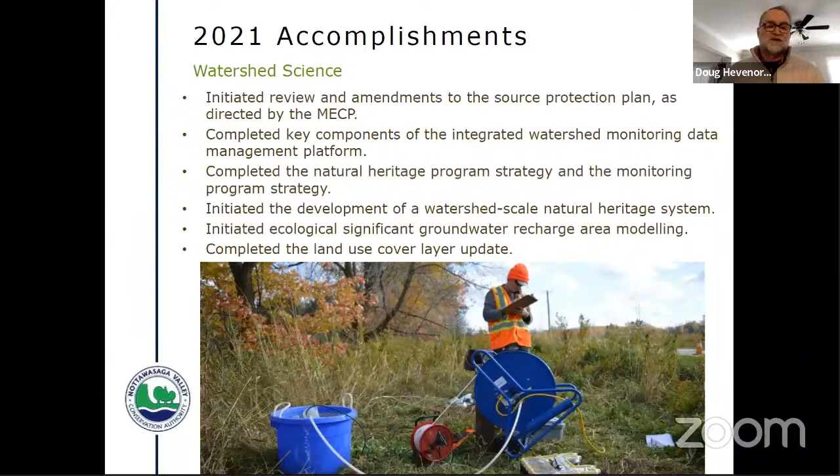The education program, as a result of COVID, has been very hard hit over the last 2 years. In 2020, we had no delivery of programming whatsoever at the NVCA. Again in 2021, we were hit very hard at the first part of the season. We did run a very successful camp for young campers at Tiffin this fall, with 400 people participating. It's one of those programs that relies heavily on levy, and as we go through discussions in the transition period from December 31st this year until December 31st, 2023, we'll touch on some of those points. Programs that don't receive levy don't have other sources of finance, which can be quite challenging. Education recovers a lot of its programming but still requires some nominal seed money to get it going, and it's an important program. We deliver programming to over 14,000 students in Simcoe County, tied right into the curriculum at the grade 4 level. Next slide, please.

Stewardship and restoration are also the lifeblood of the watershed. Stewardship does the majority of its work along the streams. We are a riverine system running from the Oak Ridges Moraine up north to the Georgian Bay Basin. The only part of our catchment that doesn't run into the Nottawasaga is over in the Collingwood area with Black Ash Creek, Pretty River, and the Batteaux, which run into Georgian Bay directly. We've done the lion's share of our work the last 2 years down in the southern end of the catchment in Adjala, where we were very successful in remediating a cattle operation that was crossing the river system. This is the headwaters for the Nottawasaga River, and a remarkable legacy resource for the Chinook salmon that are part of the really active fishery just to our north in Georgian Bay.

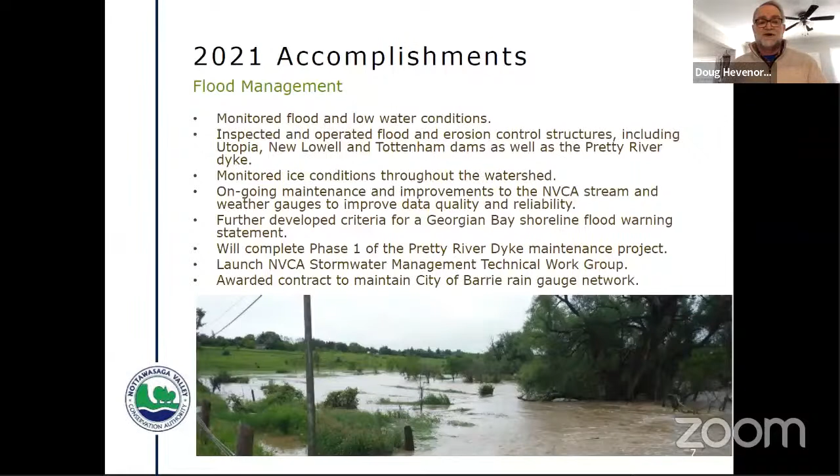This year we're working in conjunction with Collingwood through their funding of $100,000 to do tree removal maintenance and understory maintenance in the area. Unfortunately, the catchment has a large number of native ash trees that have succumbed to the emerald ash borer, so it's a two-pronged approach: we're getting rid of an invasive pest out of that area while still making the area safe for water to pass through.

In planning and development, we work through a lot of acts. One thing it's important for council to remember, when you get calls about our permits taking too long or why we need the NVCA's opinion, is the great number of acts we work through: the Conservation Authorities Act, the Planning Act, the NEC - Niagara Escarpment Planning and Development Act, the Aggregate Resources Act, the Green Energy Act, the Drainage Act, and the Environmental Assessment Act.

In many of those roles, we play a regulatory role where we are the entity that says no, and not everyone likes to hear no. It's not always beneficial to moving a project forward when you hear those short two letters, but it's something we don't take lightly.

We do constant measurement throughout the year of our calc, a data point for managing files. It's worked through with the MECP to deliver a file within 90 days. Conservation Ontario has challenged that calc document to move to a 70-day delivery. On the 90-day delivery, we're currently delivering at 98%, and at the 70-day, we're currently delivering at 91%. It's important that people realize we're trying to do the best we can and allow permits to flow quite regularly. Next slide, please.

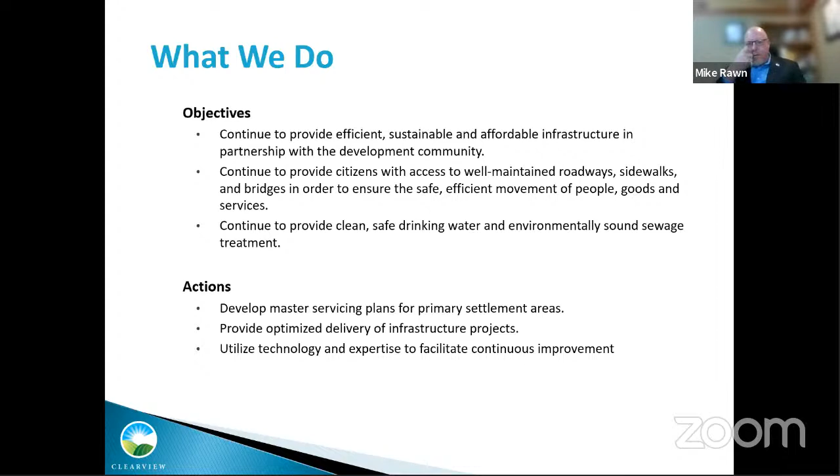That last bullet under actions is pretty key: to utilize the expertise and technology to facilitate continuous improvement for this department. For the whole town to be successful, we rely on the expertise of every employee and the input and expertise that they bring to the table. Next slide.

I think we're one too far. Yeah, we're just going to talk about this for a second. So council's aware Clearview's infrastructure needs are projected many years in advance. And most of the large projects are developer driven, and we work with the development community to ensure the infrastructure is available when needed. Next slide.

So these are some of the critical projects we're working on right now in Stayner. You can see by that list, these are projects that have been in council meetings for a long time, some of them years. Out of that $60 million worth of work that we're building in the next couple of years, 85%, or 51 million, is being upfronted by the developers. You can imagine the amount of work it takes to design, review, build, right to the last brick in some instances.

The $51 million that is being upfronted doesn't necessarily mean that it's entirely covered by the developer. So on these individual projects, Sunnidale Street, that's the Manortown project. On the next slide, I'm going to show you a map, but for some of these projects, it's partially funded—we're going to have some funding from the roads budget, some from water.

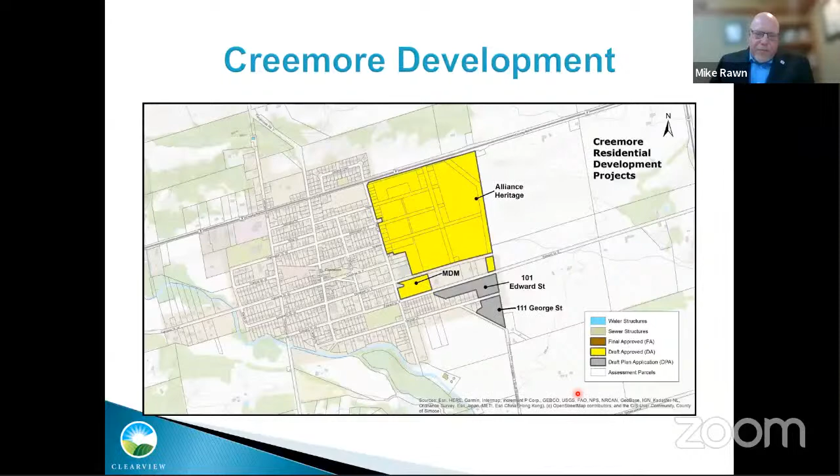The master servicing plan I talked about will address the infrastructure needs for everything. Let's go to the next slide now, Fawn. So if we just read through this list.

So I talked about $200,000 per EA—that's about the cost of it. So a master plan, we could do a master plan for Creemore, and on all those items we can address the first two phases of the municipal class EA, right? All the public input—it will allow public engagement, which I know council likes.

It will take a system-wide approach so that, you know, there may be one developer in town that has the means to advance faster than the rest of town, but as the municipality, we want to develop the town as a whole and ensure everything we build is well operated, long lasting, and cost effective to operate.

The last bullet here is pretty important. It does provide a guidance document. Now, a guidance document is going to be very critical in succession planning in this municipality. There are changes in the next few years, as there always are, but the amount of work that has to happen in Creemore, and now we've got a good developer—well, not that there were no good developers before, but a developer that seems really interested in moving forward. We want to work with them and make sure this is all done right.

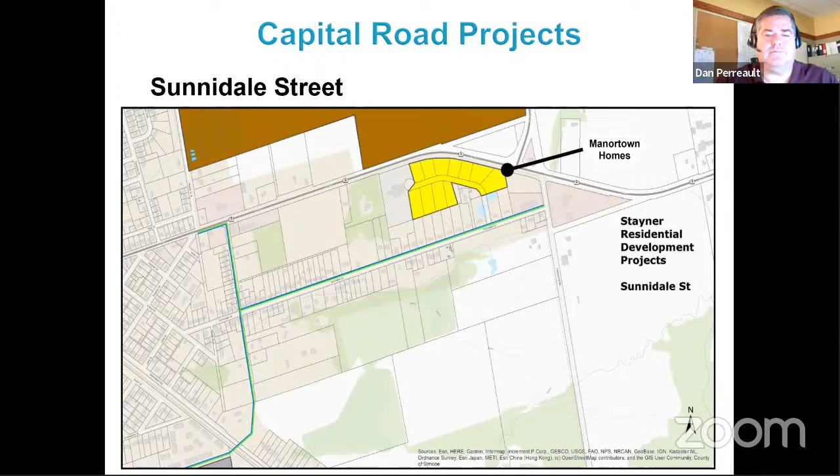Also for 2022, we anticipate the portion of work needed for Margaret Street, spearheaded by the developer as part of their approvals for Ashland Meadows Phase 1A and Phase 1B. Phase 1B in particular requires them to urbanize Margaret Street from County Road 42 to the east end of their development. There are other proposed works, indicated with blue and green lines, that Todd will speak to in his part of the presentation. The urbanization works would also include curb and gutter, storm sewer, and sidewalk.

We're also proposing to continue the concession 10 reconstruction. Phase 1 is nearing completion; it was supposed to be complete this week, to be honest, but I don't know if they'll get there—they've run into some weather, especially up on the hill. At some point this year they'll be finished, and the road will be open for the remainder of the season, then closed again next year for the remaining construction from 30-31 to where they've left off this year.

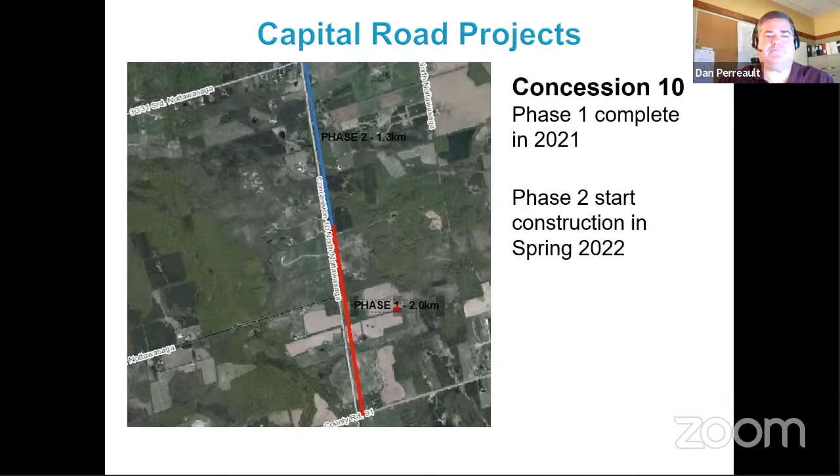Mr. Ron also spoke of Locke Avenue. We've worked quite diligently this past year on the design to urbanize it. There will be some sanitary sewer required, which Todd will speak to. As part of the urbanization, we're looking to add a sidewalk on the south side of Locke Avenue from Highway 26 down to Jonathan Court, with the school crossing moving from where it is now down to the intersection, with a proper landing spot on the north side of Locke. This would require eliminating a few parking spots on that north side, but it will give students a good landing spot and a crossing guard further away from the highway—plus curb and gutter, new asphalt, and sidewalk, with Todd speaking to the servicing.

Another thing that I've been working on for the last year and a half or so is our street scan. All of our roads have been scanned by a van digitally. It takes video or pictures of all our roads, the deficiencies of those roads, and has compiled them into pavement condition indexing.

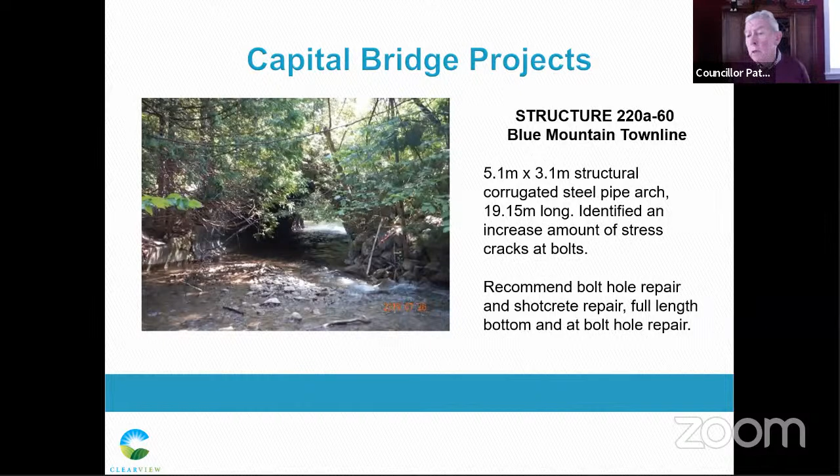The street scan, I love this software because it's database driven. In context to the framework, it's where you're going, Dan, and in all your major construction works, we're not flying by the seat of our pants anymore. Not that the visual wasn't good and experience rated, but now we have much better consistency across our decision making if we use the data.

Sorry, if I can just add, so that we have this done, my thinking is that we need to as a whole start thinking about what it's going to cost, for water and sewer. The rates are built in, so they know they put in a water main today, and it's going to need to be replaced in 100 years, and they factor that amount into the sewer rates. That really hasn't been done.

It's not any fault of anybody's, but it's really not done in the roads industry. I guess it should be done as part of our asset management, but we're certainly going to be working on that in order to develop some sort of, I'm not going to call it a rate system, but an amount that could be considered by council for capital road resurfacing and replacement over the years, so that we're not coming to council every year asking for 5 million dollars to do some of this work. So that's the thinking of this program as well, and that will be able to tell us.

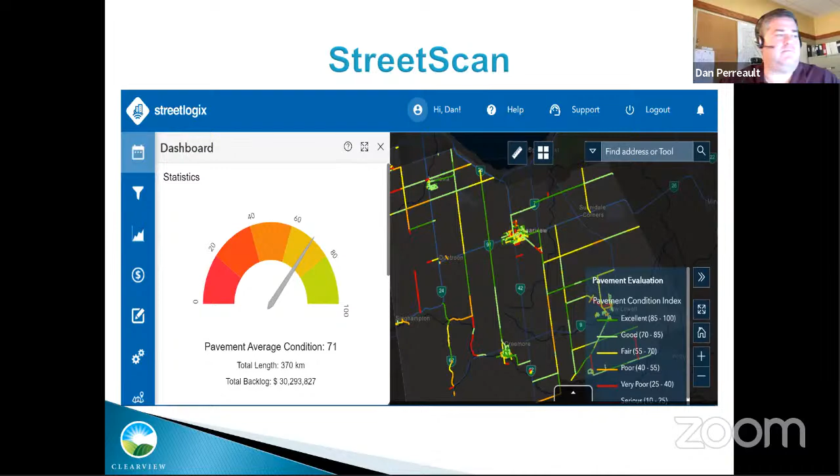Yep. If Fawn, if you can put back that slide. I think it's the next one. Is that? That's right, sorry. That's right, yeah, it's the next. There. Oh, no, it was right behind the other one. Keep going, but 3 slides.

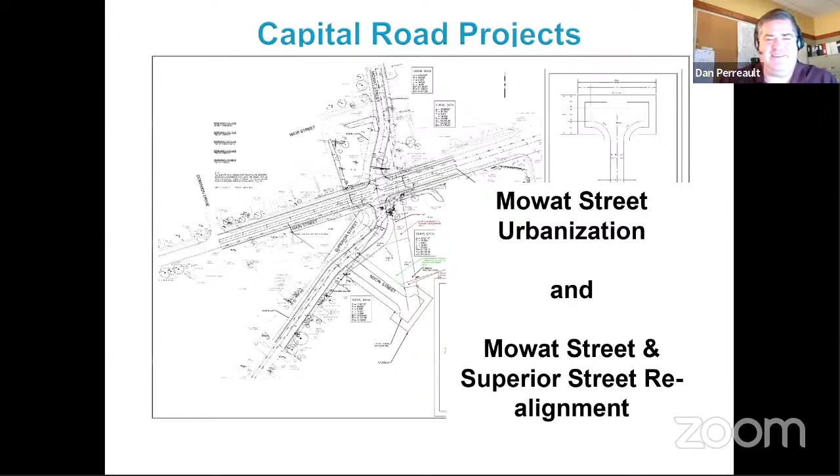So we're going to be moving the crosswalk when this is all done. It'll now be located in the property that's right between Stayner Collegiate and Clearview Meadows School. Is that right? That's where the crosswalk is going to be moved to.

This is right at Clearview Meadows, right at the front door. Yeah, exactly. Okay, so that's perfect. Okay, I'm happy to see that happening. By the way, good stuff.

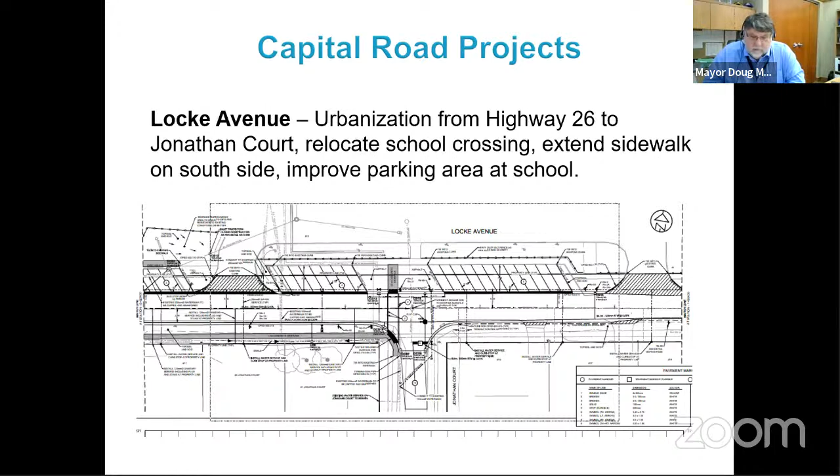The last thing I want to mention, you made a really good point about our equipment reserves, specifically for our heavy equipment reserves. I know we've had significant savings as a result of our work with the enterprise rental and leasing operation. You're showing approximately $73,000 in savings as a result of the small truck fleet, and yet you're talking about the equipment reserve being in a deficit of about 100,000.

So I guess this is pretty close. It's not exact numbers, but it's pretty close that we're saving some money on our small vehicles, but we're definitely going to need to catch up on our equipment reserves. Is that how you interpret it as well?

Yeah, thank you, Your Worship. Yeah, I believe the 73,000 was savings to our maintenance. There's also contribution from a portion of the operating that goes into those what would have been capital replacements of those small duty vehicles, light duty vehicles.

Light duty, that's a better word. Sorry about that. Hey, they're serious trucks. I get it, they're just light duty.

So there's savings on both ends, but what we can really tell is the savings on our maintenance, because all these trucks will cost us no maintenance. It's built into the program we're working with Enterprise on. So in the past it's been an overall reserve, I'll call it. We didn't have 2 reserves, it was just an equipment reserve.

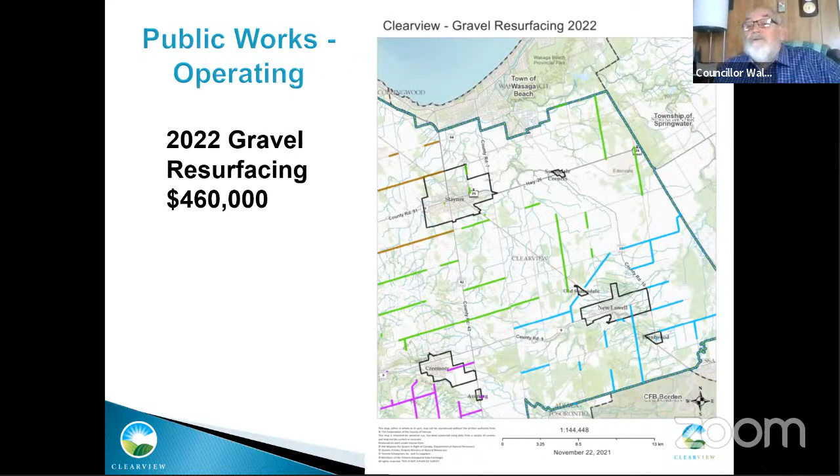Yes, your worship, I was just going to make a quick comment about North Street. We talked about Mike's interim idea — is there a possibility to do a bit of an asphalt connection across the boulevard there to connect for now until the developer moves forward? That property has been sold and changed hands two or three times this last while, so I'm wondering if there's a possibility of an asphalt connection at this point to tie it in for safety. There are a lot of children in that area who walk along that road to school, to the connection of the existing sidewalk by the daycare, and then to the crossing guard on 26.

Precisely what I was thinking about. Mike, have you got a comment? We'll certainly look at that, your worship and councillor Walker. It's probably Dan and Todd's expertise more than mine, but we could probably start with the trail and look at paving it. I don't know the geography in front of that place — I know what it will look like when finished, but not what it would take to do, what vegetation or cost we'd be looking at. So we'll look at it and get back to you at the next council meeting, or maybe next budget meeting.

Okay, good, thank you very much. If I may, maybe to the CAO — perhaps you could reach out to this owner and see if you can set up a discussion between Mike, Dan, Todd, the owner, and yourself, to see if we can come to some type of resolution on that.

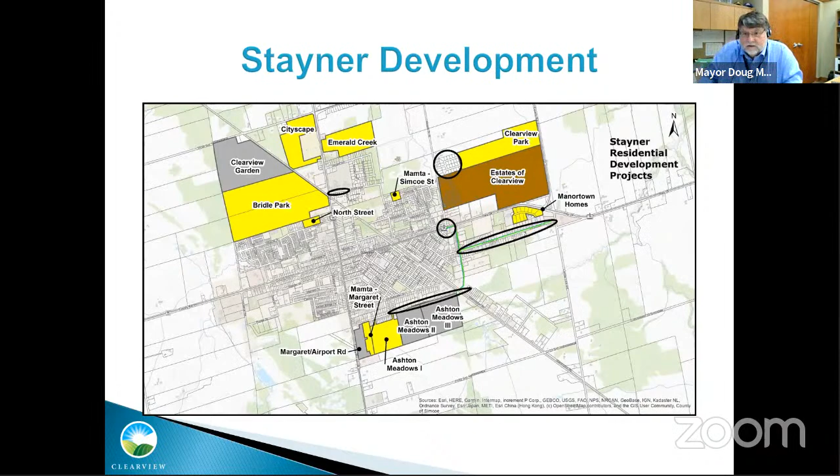All right, members of council, I think we're ready to move on unless there's anybody else. Just looking again, I don't see any other cards or hands. So who's got the next section? Is that back to you, Mike?

That would be your owner's representative for the drinking water and sewer systems, Mr. Todd Patton. Mr. Patton, welcome. Thank you, Your Worship, members of council. You've been very quiet and patient, happy to take it all in. No, thanks for your time today.

I'm going to be presenting the water, sanitary, sewer, and storm part of the Public Works budget. As Mike mentioned earlier, keep in mind the water and sanitary I'll do first, and that comes out of basic user fees. The storm, which will be a couple slides at the end, that is funded by taxation. So we'll start with the water and sanitary, specifically water.

After each section, if there's any questions or concerns, please feel free to ask away, fire away, no problem. You'll probably hear a lot of repetition as we discuss, because a lot of this is focused on development as well. Some big numbers out there, but once again, it's all developer driven. I'll touch quickly on what's going in for water and sanitary, and we can keep moving on.

So we'll start with the drinking water systems. I'm just going to talk about a couple items of interest, the bigger capital items within our water facilities. You see HMI and PLCs. What that means is HMI is a human machine interface and PLC is a programmable logic controller. When we talked earlier about utilizing technology in our action items, this is part of that.

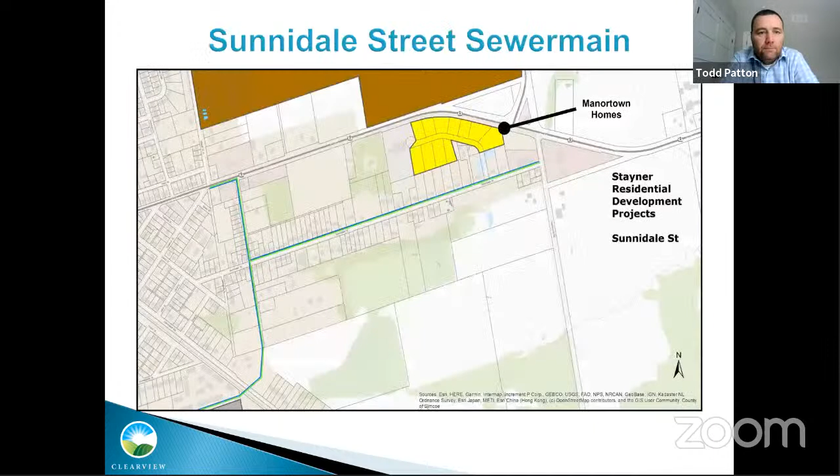Next slide please, Fawn. Once again, getting into the Sunnidale Street development at Manortown. Another slide coming up will talk about a sewage pump station, which ties in with running sanitary down Sunnidale Street. I know you're probably all well versed on what's going on there now. It will also improve or help our source water protection, having a main supply of our wells for the Stayner drinking water system down that street. It makes me rest easier knowing we're going to sanitary sewers, since even though a lot of upgrades were done on the septic systems down there, they only last so long. So this is welcome news for myself.

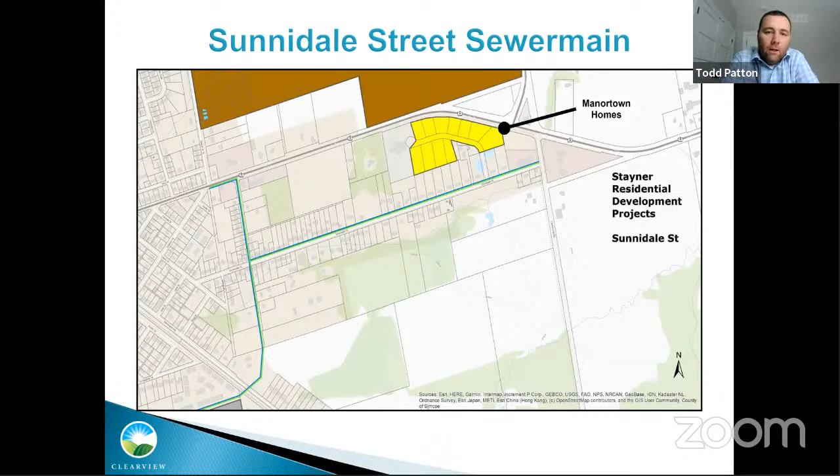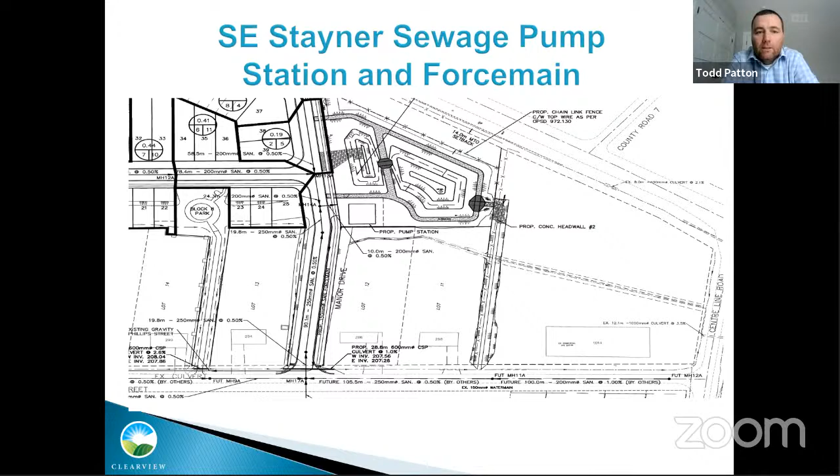I think working together as public works now, when we get urbanization of roads, you've seen a lot of examples here where while we're urbanizing a road, we ask how old is the water main and look at all those. This is an example of doing everything at once instead of just putting a sewer main in. Let's do the water main at the same time because it benefits others as well.

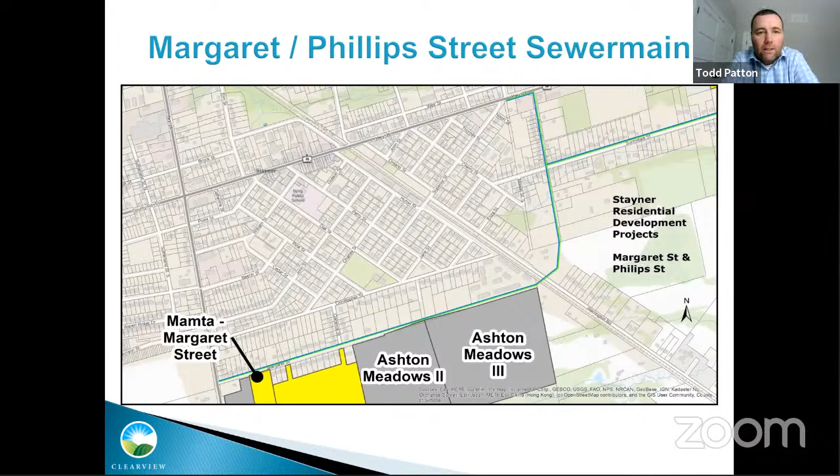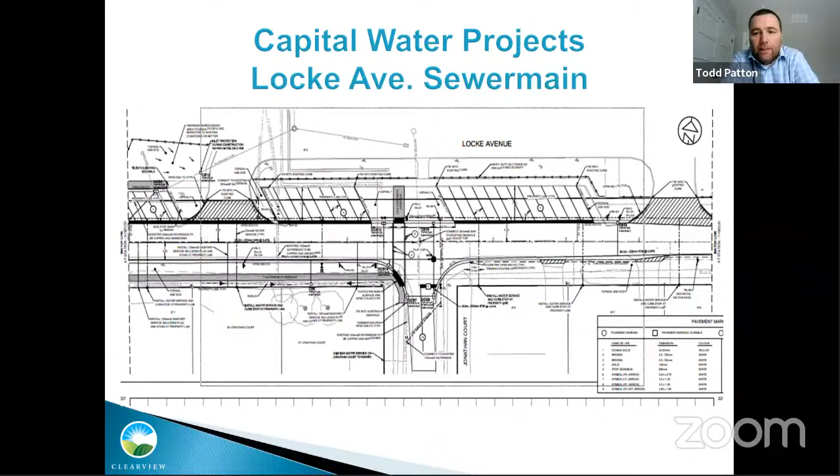And that kind of ends the sanitary portion. I know I threw in a slide with water and sanitary at the end, but I think it was important for you to see the rates and see where we're at.

Thank you, Todd. I just quickly wrote that down. You said 3.5% for both water and sewer rate combined increase, is that correct? That's correct. I believe it works out to a little over 5% for sewer, but a little over 2% for water, so when you blend them together it's 3.5%. All right, thank you.

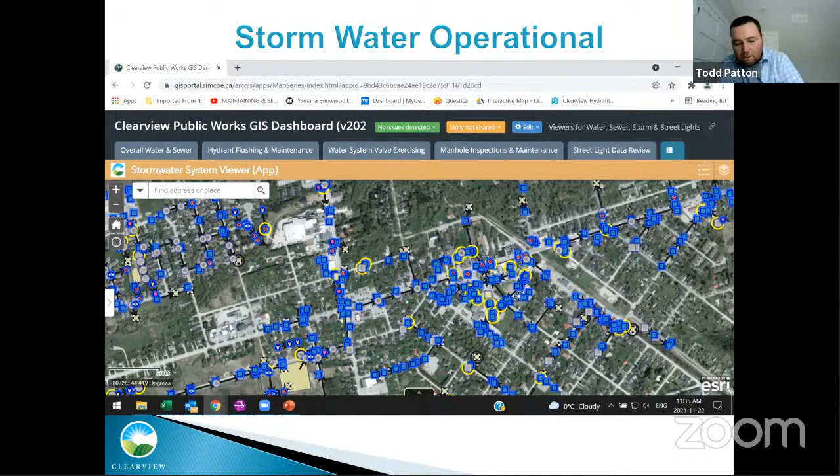Next slide please. As for works we're taking on with stormwater, we're going to defer a couple items. Stormwater management pond cleanouts—we had two that Burnside identified and priced. The pricing was probably high, and they admitted it, but we're deferring the 1.7 million proposed for cleaning out a couple stormwater management ponds to help keep the budget where we need it. We'll likely have to look at this in the future, but for now it's deferred.

That pretty much concludes my public works portion, water, sanitary, and storm. Any questions on storm, water, sanitary, or roads? Todd, don't go away, I'm sure there might be something for you. Members of council, any questions to wrap up this section? Flipping through cards here, anybody? Seeing none? Okay, I've got a quick question for you, Todd.

When you talk about deferring the stormwater pond management and cleanouts, I've had a couple calls about a few of them, and I'm wondering, can we get an update on what that actual cost is going to be, maybe in a report, so council can consider that in the future? I'm thinking of the pond at the south end of Stayner Elementary School in the McKean subdivision, and the pond on Country Lane here in beautiful Stayner with the walking trail around it. Also, do we require extensive permits from various ministries to do that type of work, and is there a time limit as to when we could do it?